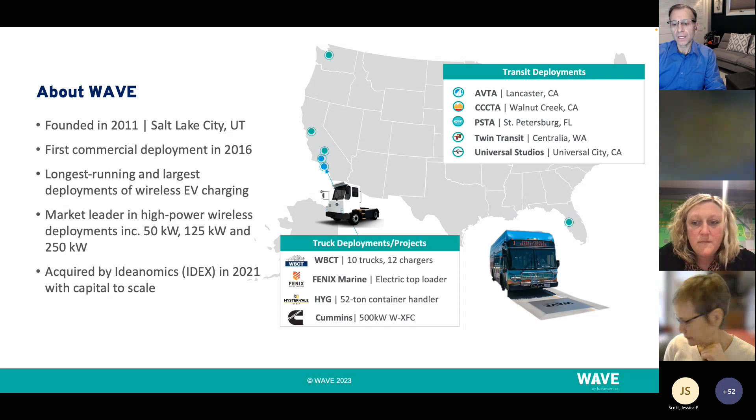All of our transit customers up here on the right are repeat customers or soon will be. The system down at St. Pete at PSTA just back in October went through Hurricane Ian unscathed. We've also got several truck deployments, including systems at the Port of LA, because a lot of the problems that we solve for moving people, we also solve for moving goods. So what are those problems?

What are the problems that wireless charging solves? First, I want to make sure that as I go through this, I'm not necessarily saying there's no role for conductive charging, or am I advocating everything should be entirely wireless? In certain applications, certain duty cycles, in certain environments, there are benefits of wireless over others. So I want to make sure I'm making that clear. And one thing to note too is that, you know, when we talk about wireless, we know for a fact

we don't necessarily need to plug something in to transfer power, right? We have our phones that charge wirelessly, our toothbrushes, and even though they rest in a holder, there's no necessary contact that has to be made. The electric charging has happened by an electromagnetic field that's induced by the charger. But conductive chargers do require contact, and they do require manual refueling. And because the energy density of lithium-ion batteries is lower than that of fuel, it requires more frequent plugging, more manual labor. In this case, you can see there's 2 plugs that have to be plugged into that bus.

Sometimes they're heavier cables or liquid-cooled cables. And all that plugging and unplugging presents another challenge, which is plug-in connectors are prone to wear. Heat causes expansion, contraction, dirt, dust can interfere with contacts. That causes problems. The New York Times is one of several outlets early last year that highlighted some of the problems. And these problems scale accordingly when you're talking about charging large EVs, which require more amps and more frequent plugging in. And of course, as we talked about, the plug-in chargers, you have to take the vehicle out of operation to charge it, which could disrupt operations or require extra vehicles.

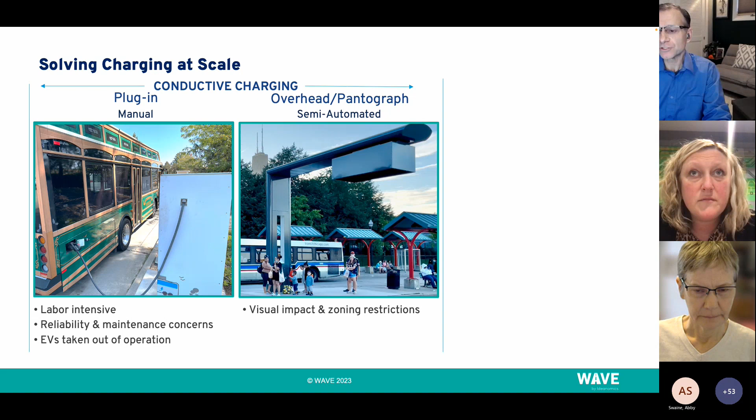This is an awful lot of hardware to simply automate charging. This is a trial down at Chicago's lakefront, and that's just for a single bus. Imagine if all those stations there had pantograph chargers—you wouldn't even be able to see the skyline.

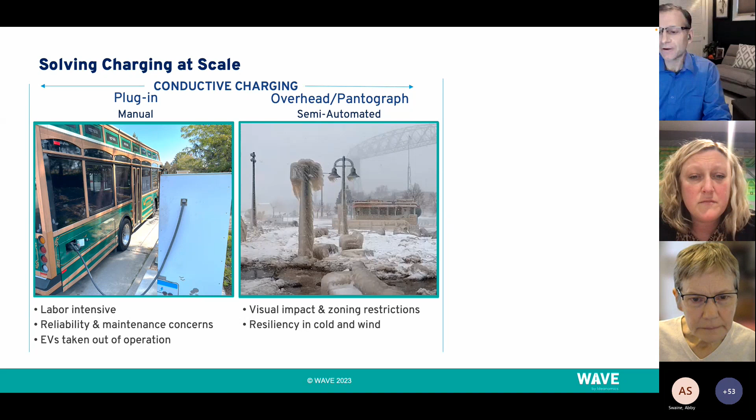Obviously, these mechanized systems have problems in cold weather. You can see that this is likely not functioning—that's a pantograph charger in Duluth, Minnesota. And of course, because they are highly mechanized, they require a lot of maintenance, requiring people up on bucket trucks, high above the ground, going up there frequently to maintain those systems.

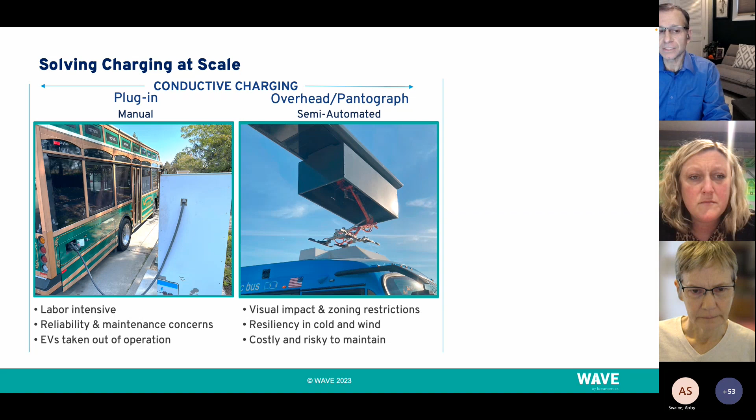So what does wireless offer? It's fully automated, cable-free, and easy on the eyes. It works through snow, rain, ice, and even hurricanes. With no moving parts, it's proven to be highly reliable and easier to maintain than many conductive solutions.

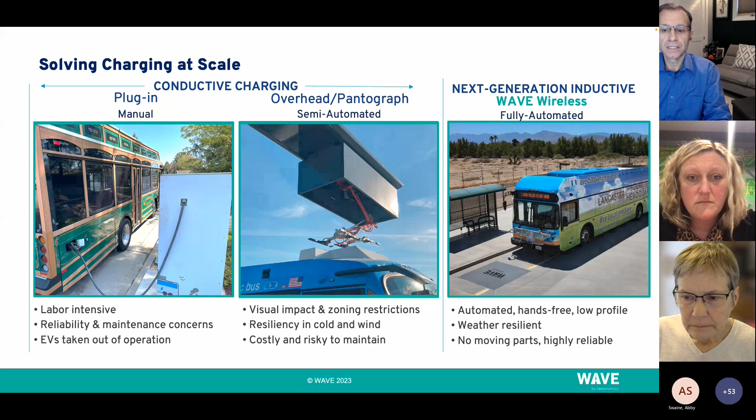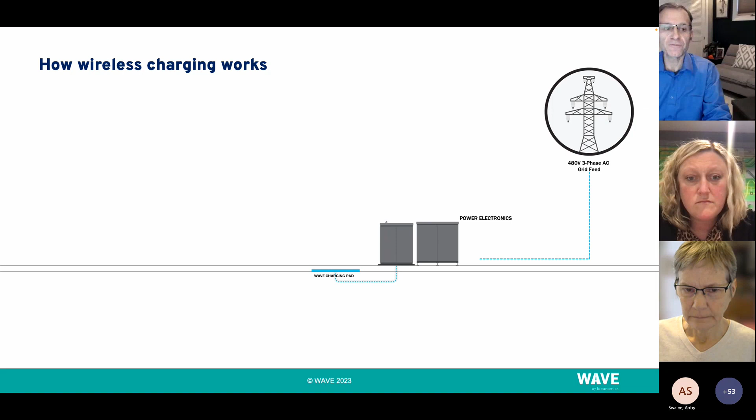How does it work? We take a 3-phase AC grid, which is typical for charging systems, and wire that to our power cabinets. That then gets wired to a ground assembly pad embedded in the pavement. Using transit as an example, the operator would pull in and align the bus with pavement markings. Charging occurs wirelessly when there's a handshake between the ground assembly and the vehicle. The vehicle is immobilized, and within seconds, a magnetic field in the ground assembly induces an electric current.

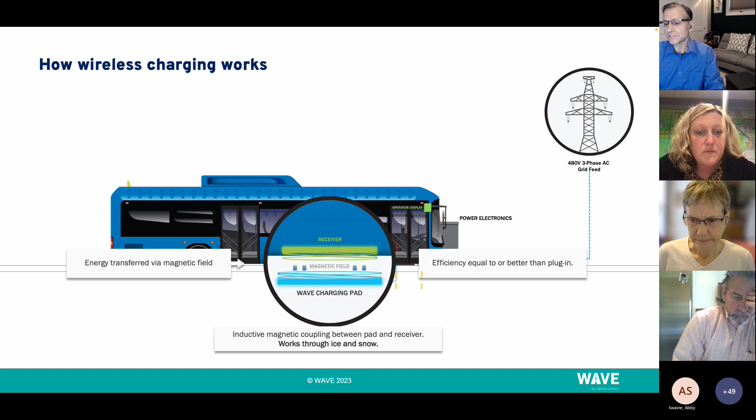That current is induced on the assembly plate mounted on the EV's underside, and that power is then sent to the battery. It's worth noting this process is entirely automated, so there's nothing to forget, and all the vehicle's auxiliary functions operate as normal. The efficiency is equal or better than a conductive charger—something a lot of people assume is inefficient, but it's actually equal to most conductive chargers. Charging ends when the brake is disengaged or the battery management system ends the charging cycle.

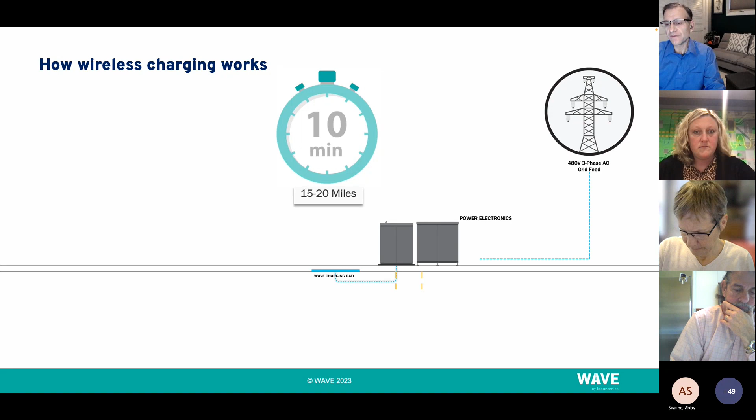At 250 kilowatts, you can get about 15 to 20 miles of range on a Class 7, 40-foot bus. Do that 7 times a day, that's 70 to 100 miles. So minimally, you're getting 45% more range on a 155-mile bus, which is significant.

As far as, what am I not advancing here? Having a problem, sorry.

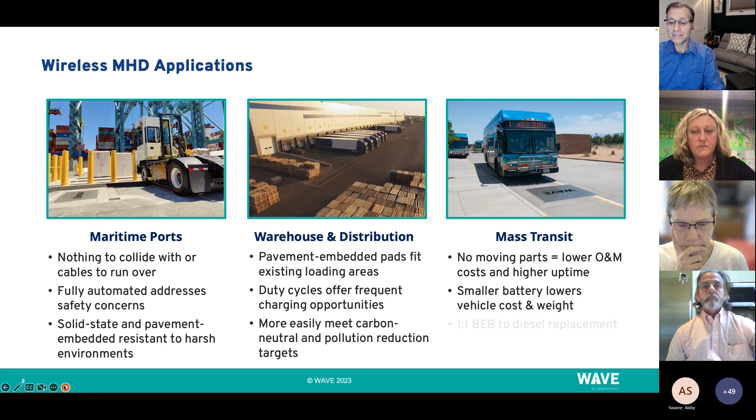There we go. Warehouse and distribution, a lot of the same things—embedded pads in the loading dock, where there's not a lot of space. Pavement-embedded pads fit at the existing loading areas, so there's no extra construction or having to remove areas. Duty cycles align well with the need to charge, and it allows these warehouses to more easily meet their carbon neutral pollution goals quicker when you remove the barriers.

Mass transit, we kind of talked about.

How does this translate to reducing fleet costs? Let's take an example: a bus that's $780,000, gets about 150 miles of range, and weighs around 32,000 pounds. Typically, that's not going to be enough, so a transit agency or fleet operator wants to add more battery. But there's a diminishing point of return, because as you add more battery, you add more weight, which decreases efficiency.

With wireless charging, we're actually able to reduce the battery size because we can charge it en route or during scheduled stops. That lowers the bus cost—scale that over the whole fleet—as well as reducing the weight, which of course has an impact on consumables such as brakes, suspension, etc.

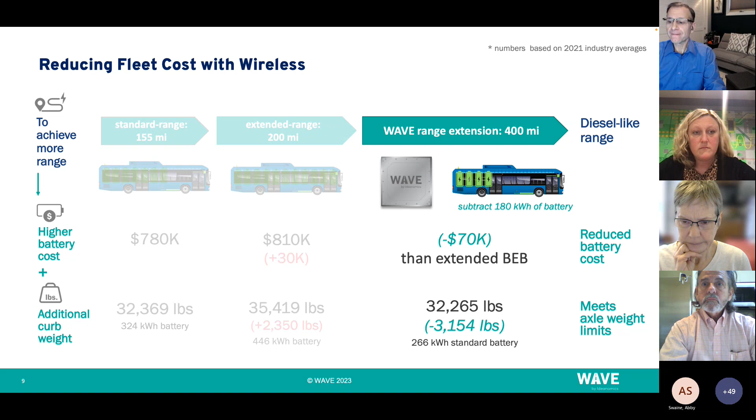Did I hear somebody say something? Okay, just quickly, I want to wrap up.

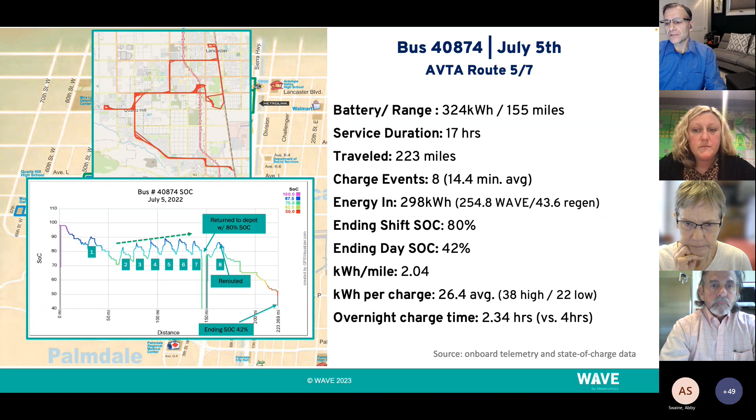It only charged once because that's all it had to do, and it ended its 17-hour day with a 42% state of charge. Had it charged in the evening, it could have basically run perpetually. So when you talk about the ability to get buses or trucks to go as far, the solution is to keep that charging en route during those duty cycles, just like we talked about with that airplane.

So just a quick summary: wireless charging more easily enables medium and heavy duty EVs to meet diesel range. It reduces total cost of ownership via smaller, lighter battery packs and lower charger maintenance and operation costs. And it's more resilient in harsh environments - snow, wind, cold, and even hurricanes. I'll make sure everybody gets case studies as well as a link to that video.

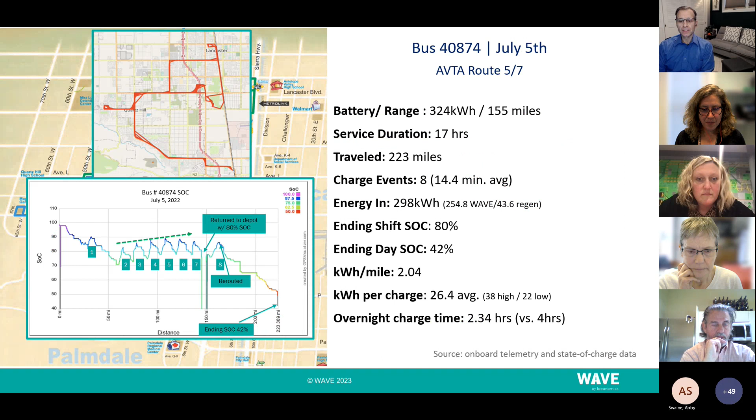What we like to talk about is wireless addresses the challenge of when there isn't a lot of time, when there is a long, arduous duty cycle that's continuous. So certainly the technology is applicable, and we do have interest. But typically, when you look at the cost of wireless charging and the opportunity to plug those in, it may be more feasible cost-wise to just have somebody plug those buses in if there's a plug-in charger available. Does that answer the question?

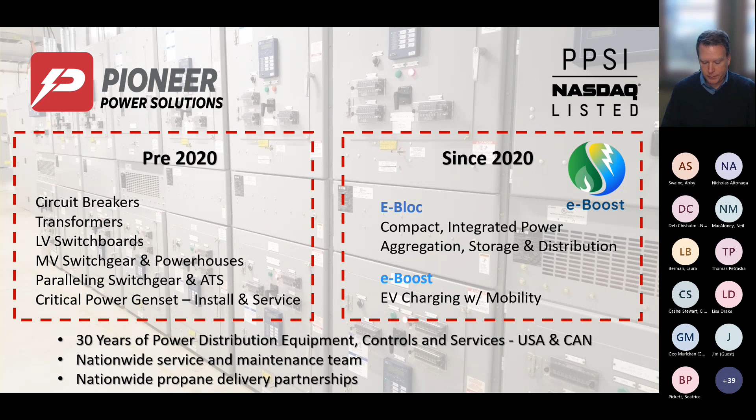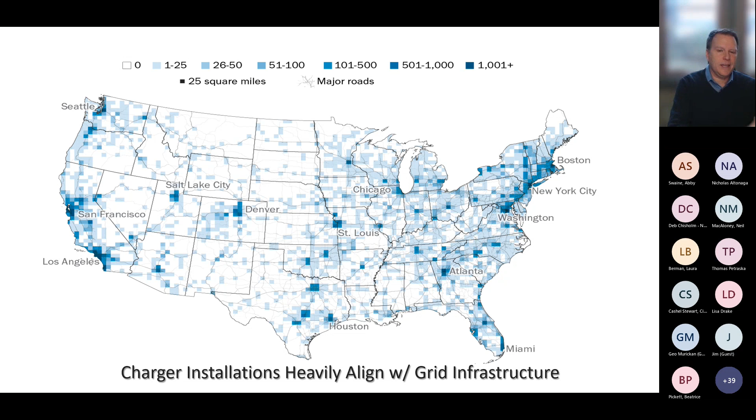How do you charge your vehicles before you actually get connected up to the grid? So one of the challenges that we see time and again is that charger installations are very much aligned with the grid infrastructure. And the more rural you go, the more remote you go, the harder it is to get sufficient power for the larger vehicles. There are some locations even that just won't have sufficient power going forward. And although most may need a temporary solution, some may need a more permanent solution.

So as it was mentioned earlier, I have the opportunity to meet with all the major truck manufacturers on a regular basis. This is looking at one of the systems that is actually OEM'd by one of the electric vehicle manufacturers.

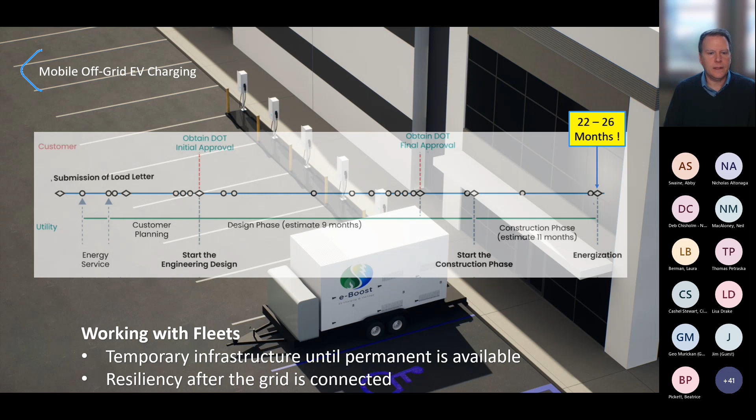Next slide. So this is looking at one of the off-grid electric vehicle charging solutions. Now, what I want to look at is not this one necessarily specifically, but that it has the building blocks of all different types of electric vehicle charging.

Next slide. So in this case, it has a 240 kilowatt fast charger, a couple level 2 chargers, a 300 kilowatt propane generator, and 6 propane tanks.

In addition to that, next click, it has an eBoost Realm, which is real-time monitoring of all these devices. We hear often about chargers not working because we are often in remote areas, because we're off-grid. The chargers really need to work all the time. So we're monitoring the chargers in real time to make sure they're working. We're monitoring the generator to see when it needs servicing. And we're monitoring the propane levels so it can automatically go and ping the local provider to bring in propane.

Next. On top are solar panels for the parasitic loads. This means that chargers are always pulling some power. Even when they're, quote, off, they're still pulling some power.

We also use an LTE mesh, so we're doing a cell signal up to the closest AT&T or Verizon network. Now, if you are far in northern Maine and you don't have a good cell signal, we also do it using Starlink satellites. So no matter how far you go, how remote, the off-grid charging works.

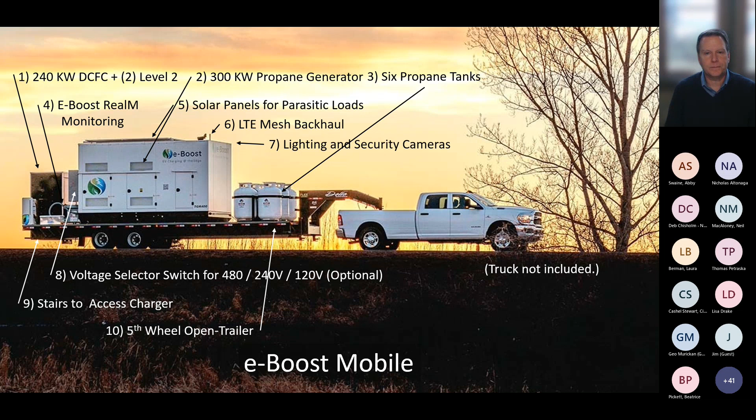Next. And this is just another way of looking at it. It's really just building blocks, right? So you can start very small with maybe a 30 kilowatt charger, or you can go up to doing multiple fast chargers. Next.

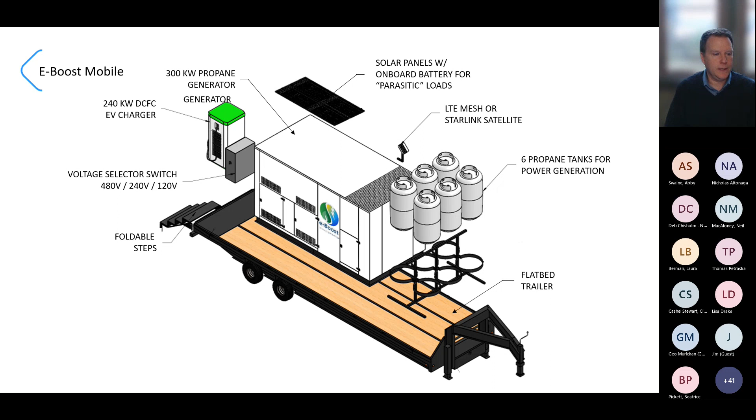So when we first started looking at off-grid solutions, our first thought was, how about hydrogen? It's extremely clean, very low carbon intensity, but very quickly you realize it's expensive and difficult to transfer, and also very difficult to find in the volume necessary, especially in remote locations.

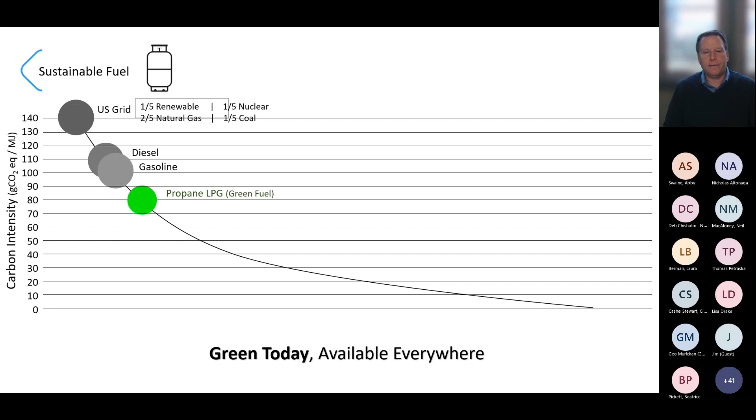So that brought us to propane, which is a green fuel, and about half the carbon intensity of the grid. Now, the great thing about this audience is we're talking about Vermont, New Hampshire, Maine, where we have 3 of the 5 cleanest grids.

So if we look at the New Hampshire and Maine grid, what is coming with propane now is renewable propane. It's available in California, New York, Vermont, coming out to the next 15 CARB states as well, and has a very low carbon intensity.

Now, if we look at the outlier, Vermont, which we know is the cleanest grid in the nation, and hats off to Green Mountain Power, there is an additive called renewable dimethyl ether, and this has a net negative carbon intensity, which mixed in with renewable propane brings it down to a net zero carbon intensity. So propane is clean today, cleaner tomorrow.

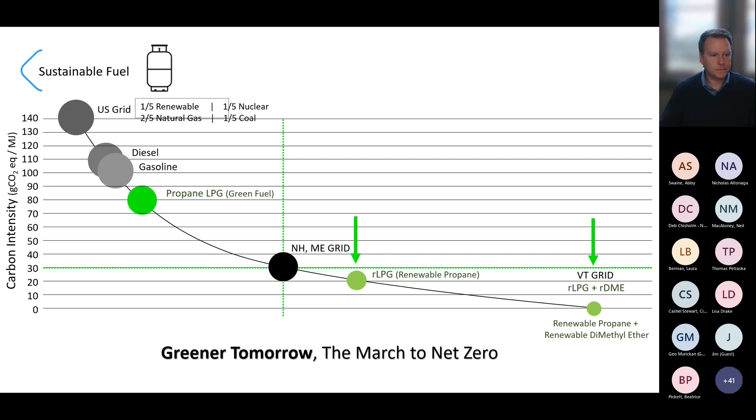Then on the pod side, it's really for the NEVI model, so it's the alternative fuel corridor. If you're going to a location where you're putting in power solutions for charging, but there's no grid within a mile of that alternative fuel corridor, you can use these eBoost pods that go up to 600 kilowatts of power on 4 150 kilowatt chargers, which is, of course, the requirement for the NEVI model.

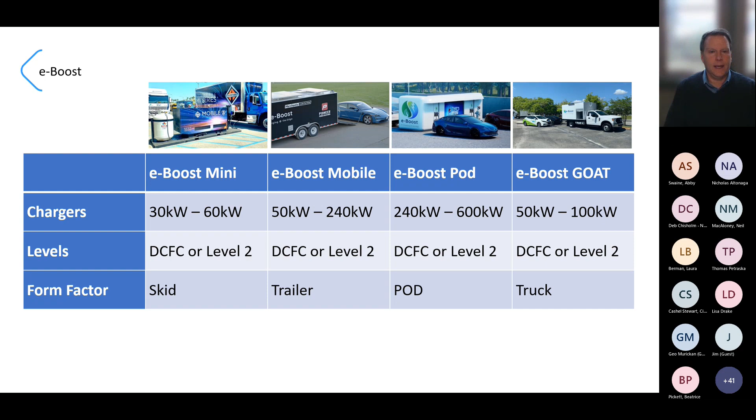And then on the right, we see eBoost Goat. So what happens if it's a city bus and it's at its furthest point in the route and someone didn't fully charge it the night before? The eBoost Goat is kind of like a AAA model, right? It's that emergency charging that comes on the back of a truck and gives you a fast charge so you're off and running again, so that you don't have to have any kind of range anxiety out there or concern about the cold.

What I look at, and like half my job is walking fleets back away from the power cliff. I need more power, I need more power. Well, how much power do you need? Because if this vehicle has an 8-hour dwell time at night, now instead of needing a 240 kilowatt charger, you can do it with a 60 kilowatt charger. And that gives you the ability to charge more vehicles over that longer period of time with less power.

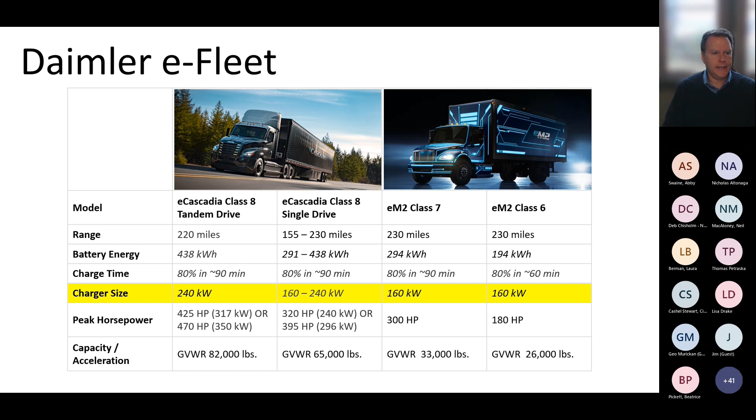And I also look and talk with the city bus folks as well, doing the same kind of math. Now, in this case, with them, and actually all EV manufacturers I talk to, one question I always have for them is how fast do you go 0 to 60? And what's interesting is the Proterra fleet will go 0 to 60 in about 6.2 seconds. Now, I don't think it's something you're going to experience on your daily commute, but it's always fun to see how fast they can go.

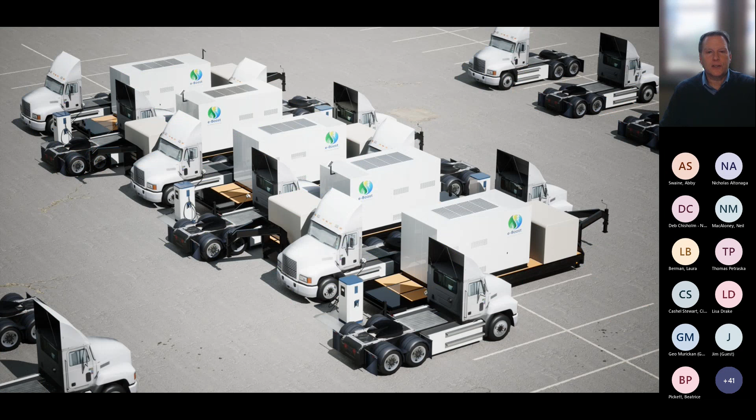A couple of quick slides on implementations. If you were charging your 18-wheelers, charging the tractor portion, this is how it would lay out in a depot.

For instance, with last mile delivery, the power unit can be rolled in over a weekend. There are skids with the chargers on them, so you're not digging up the land itself.

Another reason people use off-grid electric vehicle charging is not only the gap that sometimes exists between buying your vehicle and getting permanent infrastructure in place, but there are also a lot of organizations renting or leasing the land they're on. They may lease vehicles, they may lease the land, and not want to pay the cost to put in permanent infrastructure, or it may be a battle with the landlord who doesn't want the land dug up.

So the off-grid electric vehicle infrastructure allows you, over a weekend, to roll in power, put in a set of skids, and be charging up by the next day.

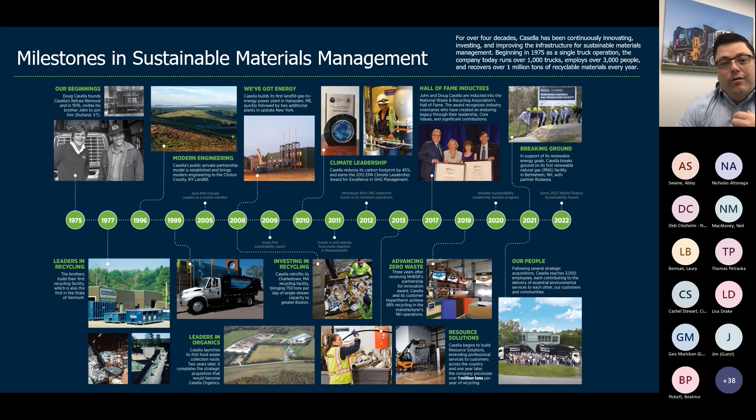We're excited that we're in the pilot phase here in Vermont. We successfully launched our first electric refuse vehicle in Vermont, and the expectation is that it's going to equate to about 7,500 gallons of diesel fuel annually. If you think back to our 1,000 collection vehicles on the road, that's a compounding factor we're very excited about. It's the equivalent to taking about 16 passenger vehicles off the road, and anytime you can have that compounding effect across up to 1,000 vehicles, that's significant.

We view Vermont as an excellent proving ground. The hills, the mountains, the cold weather, and the changing temperatures are an opportunity for us as well. We've seen it go from 60 degrees down to 10 degrees in the snap of a finger, even here in January. So understanding how the vehicles perform in those conditions, and what that means for our operators and customers, is very important for us to test through this pilot phase.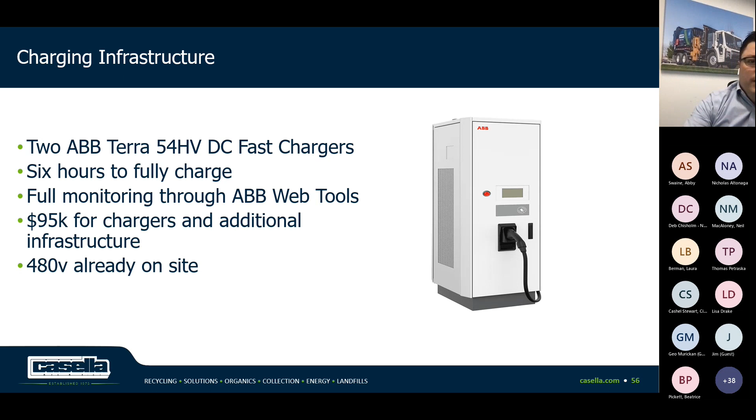About the pilot project, we went with Mack and LR Electric because our relationship with them is second to none. What Mack has done is taken their existing chassis with all its buttons, gauges, operations and mechanicals, and added the electrification onto that same truck. So there's not a huge learning curve in terms of operation—there's some training involved, but it's not as big of a lift as we were seeing with some other models. We're really pleased so far with the training program.

The other really nice thing we found with Mack was the maintenance program. We can do all the standard maintenance, trip checks and DOT things, and Mack has a program that layers on top to ensure maintenance is taken care of. One thing I'd point out: it's expected to allow for about 100 miles, which is roughly 1,000 service stops on a full charge.

I was looking back through our original documentation, and like GMP, we went through Vermont's Volkswagen Environmental Mitigation Trust to secure grant funding for the project. Some of that original documentation said something like 50 to 80 miles at that point. So even in a couple of years, we've seen an evolution in battery technology that has made this, from my standpoint, a much more palatable pilot project, because now we're approaching similar performance to the diesel machines.